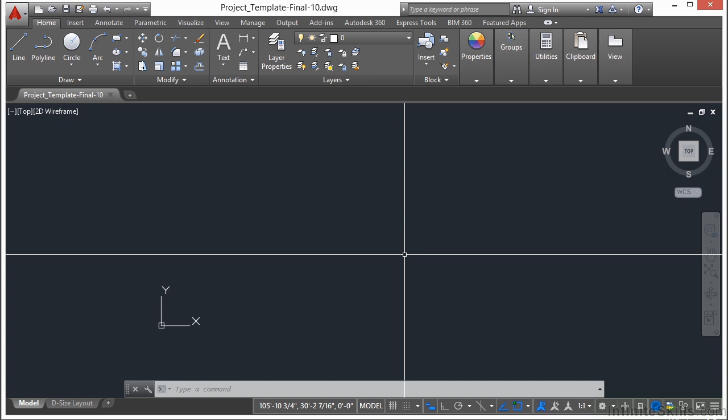We're going to add 2 blocks into the file. So open up your project template file that you created earlier. I create a typical one to start with and then a final version as well so that I have a before and after example file available to you to use. I'm going to save this into my current project folder as the before. So I've saved my file.

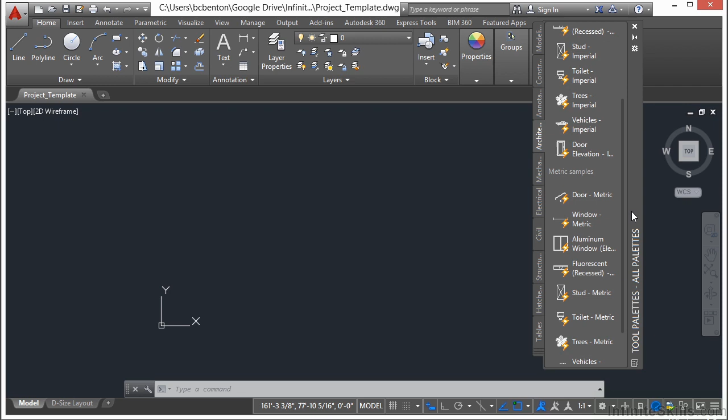Now let's open up the tool palette. Remember to do that, you press Control and 3 at the same time. Let's go to the Architectural tab. Find the window block. It's the window Imperial. They have 2 versions of most of these blocks out of the box, an Imperial version and a metric version. They're exactly the same thing, but one is set up for metric units and the other one is set up in inches. We want the Imperial window version.

Left click on it and insert it. So there's the window. This will insert the block from the tool palette into your file. You can place it anywhere for now. Now let's do the same thing with the door Imperial. Select it and then insert it. And we're going to use these 2 blocks in this file in a later project.

Now the chapter projects are adding all these features, as I said earlier, so make sure you're keeping up with them. We're slowly adding to your skill set and developing a file at the same time for later use. This is the same type of process that you'll use when you create drawings in the real world.

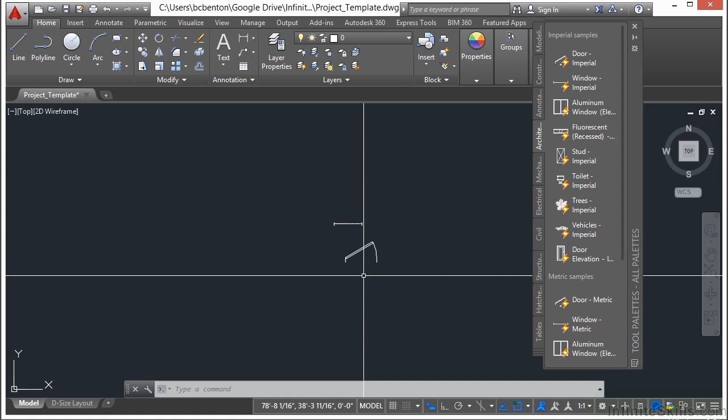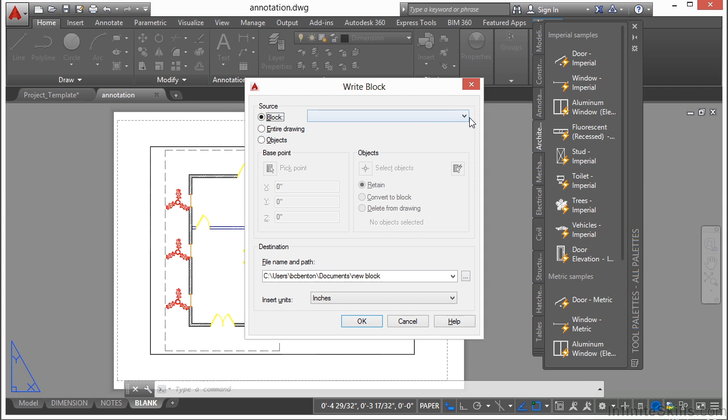Now let's go get the chair that we had worked on in our annotation example file. So go to Annotation, click Open, and from anywhere in the file, we're going to WBLOCK out our chair. So type in WBLOCK, that means write block, and we're going to select the chair block. So pick the block option, go to Chair, and then click here to browse. Now this is going to save our file where we need it.

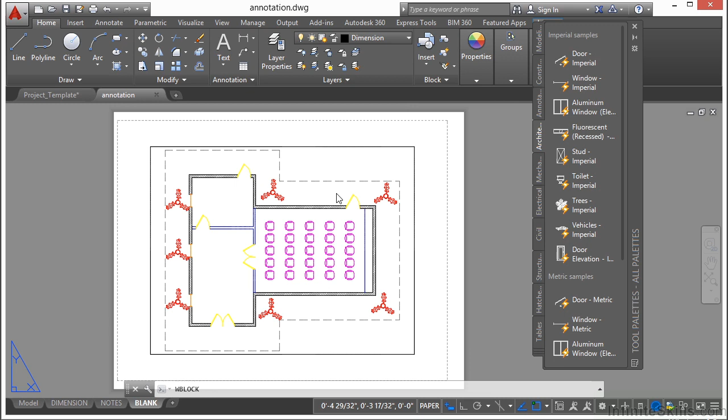Let's go to your project files, wherever you've saved them at. And I'm going to overwrite our chair file that we created earlier. Click OK. I'm going to replace it. And so now we've exported our chair block. Let's go back to our project template file. Go to Insert. And now browse to where our chair file is. Open it up. Click OK.

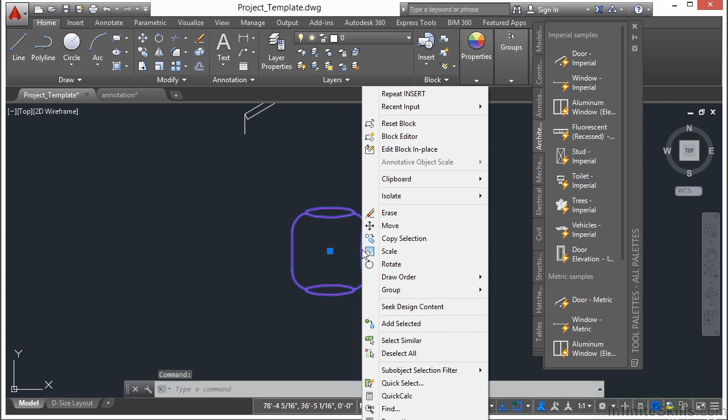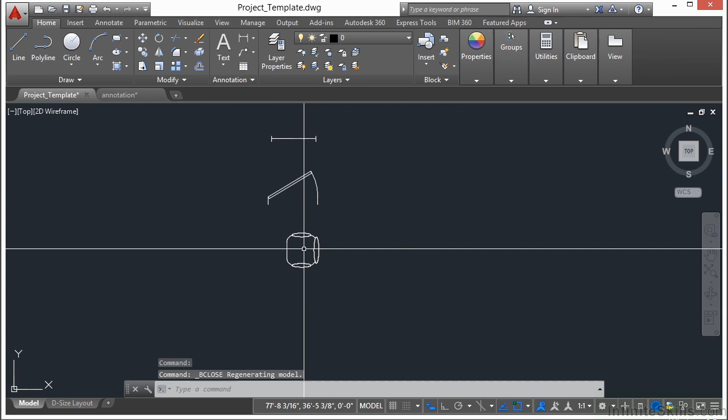And insert it. Now, I don't like the way this chair is because it's not on the right layer. So I'm going to select it, right-click it, go to Block Editor. Very simple. Select all of it. Go to the Home tab. Click on the layers here and click 0. Press the Escape key. I'm going to close my tool palette and I'm going to click on the Close Block Editor, Save Changes. There, now we have the right block in here and it's drawn on the right layers.

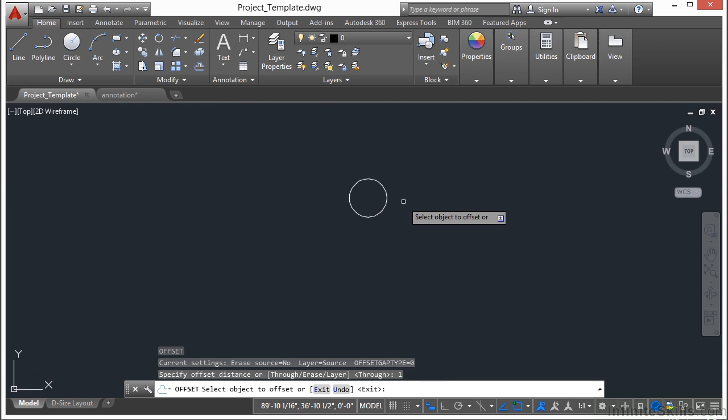Now we need to create a new block, one for our plant. So let's make sure we're on layer 0. And we're going to draw a circle. And you can draw this anywhere. Start the circle command and make the radius 6 inches. Now let's offset it by 1 inch to the outside. Now let's draw a polyline from the center. And you can just draw it straight up. Just draw it out about 12 inches up.

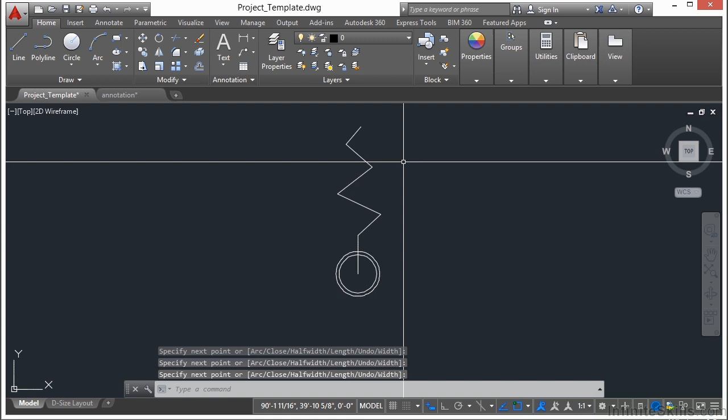I'm going to turn off my ortho now. And what I'm doing is I'm drawing the center of my leaf. Just make it look something like that. Make it squiggle. Now let's offset it again by 1/2 inch, 0.5 to one side and then to the other. Select the center and erase that line. Now that we've offset our center line, let's just make some sort of leafy looking shape.

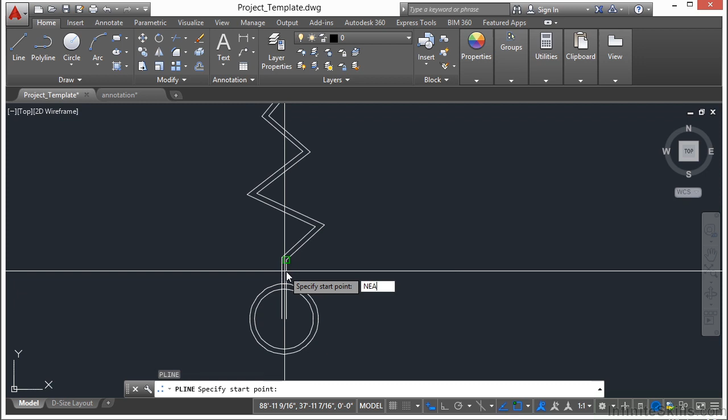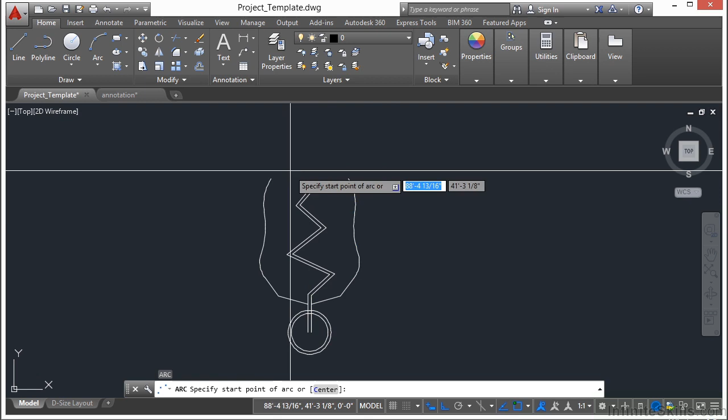I'm going to use a polyline. I'm going to start from here. And I'm going to come out. Put it in arc mode so that it has a little bit of shape to it. I'm going to mirror this about the center line of the circle, turn on my ortho, and then finish it with an arc. Turn off my ortho, just sort of eyeball it. Doesn't have to be perfect. This will get us what we need.

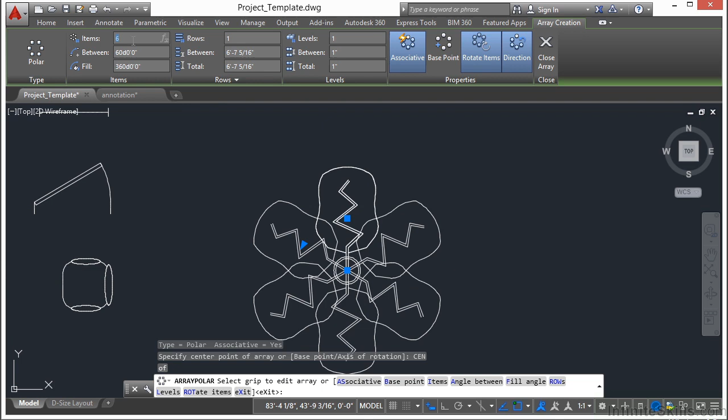Now I'm going to use the array command. I'm going to use a polar array. I'm going to select these objects, press enter, I'm going to array it about the center. And let's change this to 5. Close the array. Now we have a really big plant.

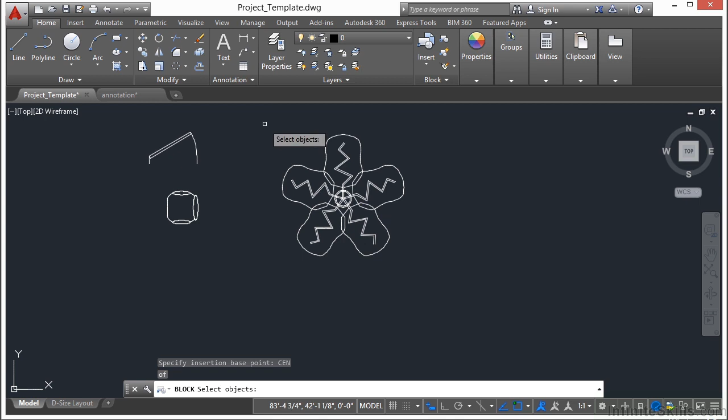Let's make this all into a block now. So type in the word block, press enter. Let's call this block plant. We need to pick our base point. That's going to be the center of this circle. Now we're going to select the objects. I'm going to pick all of that there. Press enter. There's our preview and OK. There's our block. Let's right click on it.

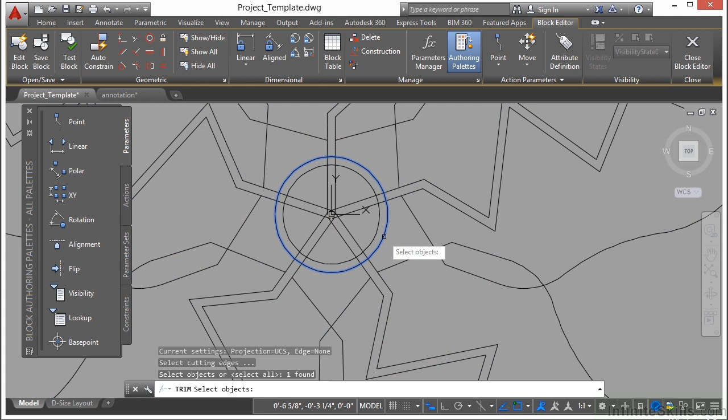Block editor. Let's use the trim command. And let's trim all these lines. I can't trim them because they are an array. So I'm going to explode the array, and now they become regular lines. I'm going to trim them about this circle and clean that up. Close the block editor, save the changes to plant, and there we go. Now our template file has a door, a window, a chair, and a plant that we're going to be able to use later on.